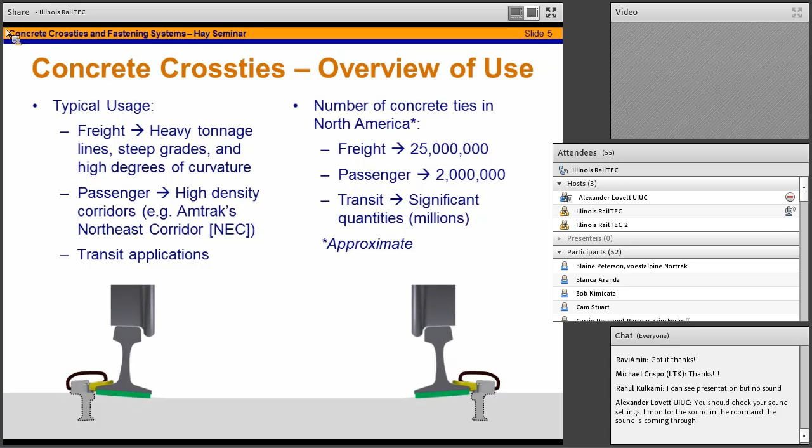So how many of these do we have in the U.S.? This is our team's estimate that we have about 25 million concrete crossties in the U.S. on freight railroads, about 2 million on passenger, most of which are on Amtrak, and significant quantities that we can't exactly wrap our mind around on the transit properties. So this gives you a feel, especially when you think about some of these components, that there are actually 4 components per crosstie that I'm going to talk about in a minute, up here on the front table. It's a significant number of infrastructure components. Yet concrete crossties still only make up about 7 to 10% of the North American infrastructure, but these are very demanding locations as described on the left.

So what are these concrete crossties and fastening systems? Some people in the room may not be familiar with them. It's a system made up of a group of components. First of all, we have the concrete crossties themselves. This is a picture of some that were being experimented on up at our ATREL facility.

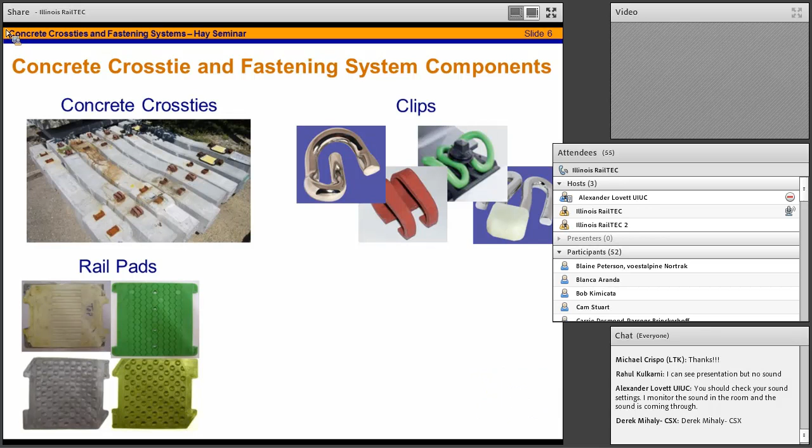We also have rail pads, and there's a bunch of examples of rail pads up here on the front table. I'm realizing it's going to be too far to go over there, so can I request a Vanna White type that will help pass some of these things around for me? It needs to be somebody on our team. Chris, Thiago, somebody there. Maybe send a couple of these pads around so you can see what these pads look like. There's all different varieties of pads, and we have many varieties of clips. So just pick a couple of pads and a couple of clips to send around the room.

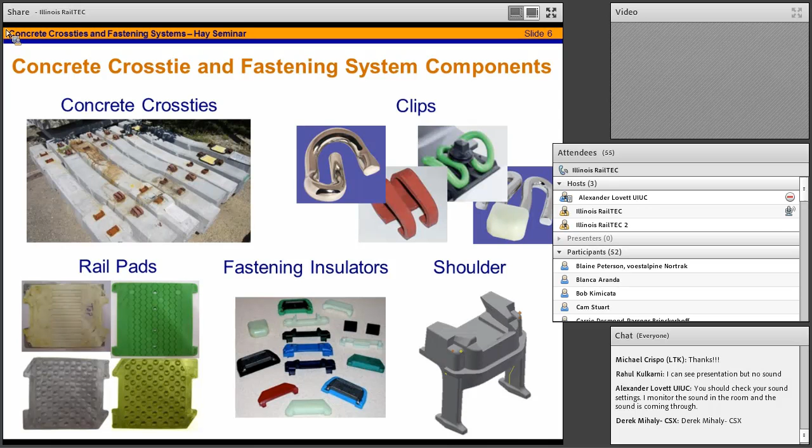These are the 4 major types of clips used throughout North America and the international community for that matter. We have insulators, many different types of insulators, and finally we have these shoulders. As I'll show in a second, what the shoulder actually does is allow you to embed the fastening system into the tie. Each of these components has to work together as a complete system, and you effectively pick one from each of these categories to come up with your system, and hopefully they work well together. Sometimes they don't, and that's part of what we're going to talk about in the presentation today.

Here's what the whole system looks like. Each one of these components being passed around, whether it be the rail pad, the clip, the insulator, or the shoulder—once you put them together, you have a nice looking system like this. This drawing is courtesy of Mr. Williams on our team.

The key component really is still the concrete crosstie, and that's what most people talk about. Our team likes to focus just as much on the fastening system, but a couple of words on the concrete crosstie really quickly. In North America, they're predominantly pre-stressed, precast products. There are a couple of instances in Mexico especially where we use post-tension ties, and you can actually see a couple of these ties in and around Newmark Lab.

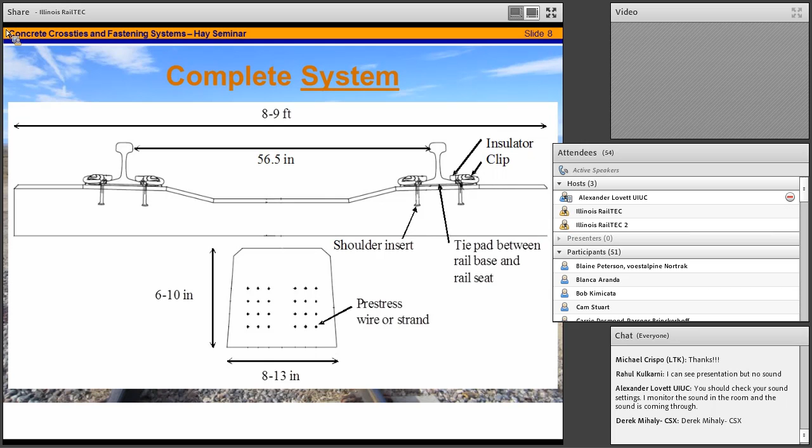Ryan Kernes, one of the research engineers that I'm ably assisted by, can show you some of those if you'd like to see a post-tension one. There are all different permutations of the system, and when you put them together and go out in the field, you have a system that's hopefully operating well holistically.

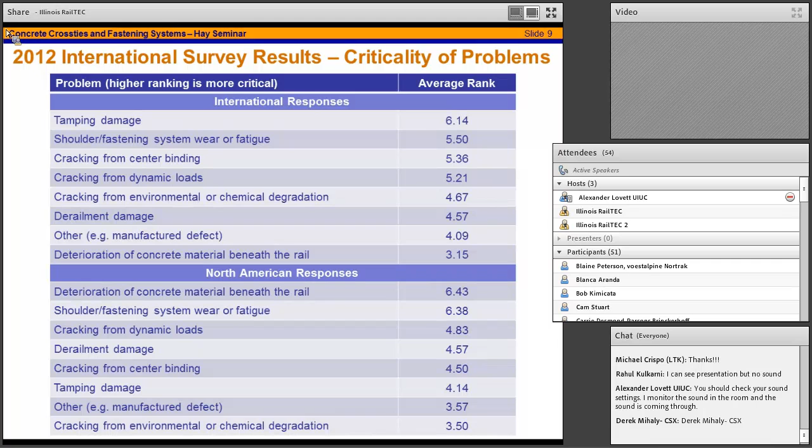One of the things we heard, and what led to this research, was our understanding that there are significant performance challenges with some of these components. This led us to conduct two different studies, the second of which was conducted in 2012 by graduate student Brandon Van Dyk, allowing us to survey the international research community to ask what are the most critical problems you have on your concrete crossties and fastening systems.

In North America, where our research sponsorship is coming from, we found that deterioration of the concrete material beneath the rail, sometimes called rail seat deterioration, and fastening system wear or fatigue are some of the most critical problems. The areas highlighted in orange at the bottom are areas we're addressing with our current research program, so we're excited to be addressing a lot of problems that the railway industry deems critical.

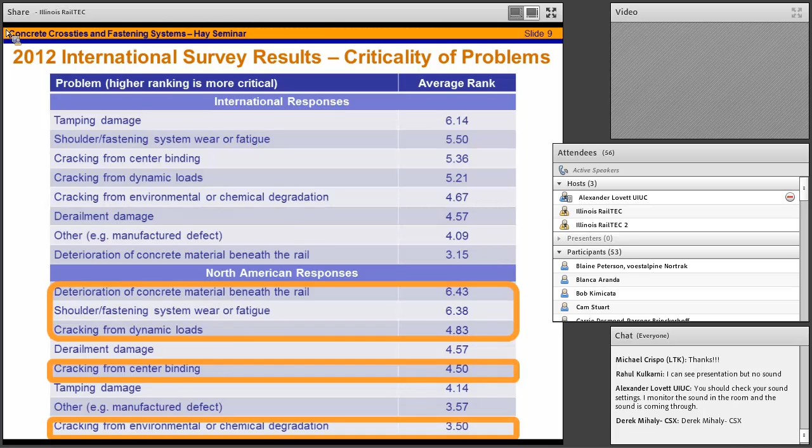Here we are with RailTEC's Concrete Tie and Fastening System Research Program. The way I like to look at it, we have three key categories or research levels: materials level research, component level research, and system level research. Within those blue blobs on screen, you can see some of the different projects within each of those areas.

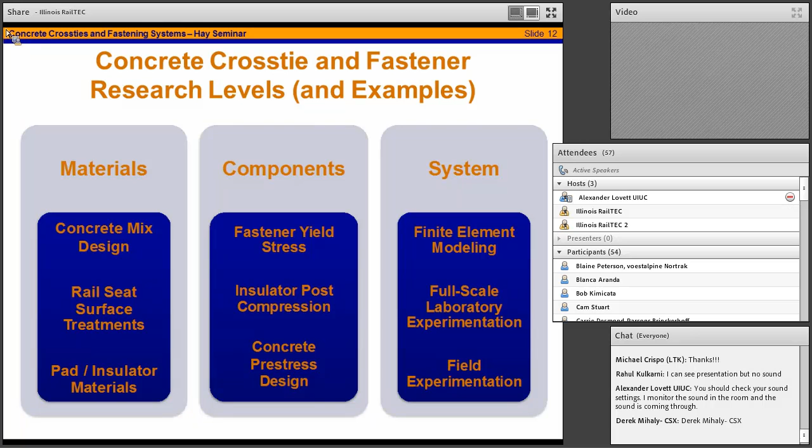On the materials side, I'm ably assisted, and many of the projects are being led by Professor David Lange. We also have component level projects that allow us to investigate stresses and strains within individual components, and then there's some amazing system level work we're doing that's centered around the development of a finite element model.

What I want to do next is go through three slides. I've already talked about our human resources—you've seen the hands go up of the people actually conducting the work. What I want to show you over the next couple of slides are the tools we use, which are only as good as the plan you develop to actually use them. But you'll see some of the tools we've used to conduct research that will be presented later.

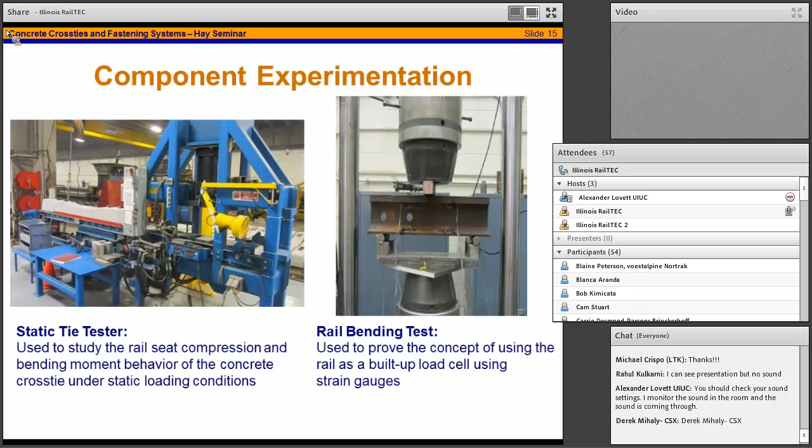At the component level, we have a static tie tester down in the Newmark crane bay. There's some work going on by Ryan Kernes using that machine right now if you want to go down and see how it operates. We also use other equipment in and around Newmark, like uniaxial testing machines, to conduct tests on rail.

This helps us understand how stresses are moving throughout the rail as they enter our fastening system. At the system level, here's a couple of our frames that we have at present. One is the pulsating load testing machine, owned by Amsted RPS, housed at the Advanced Transportation Research and Engineering Laboratory, known as ATREL, in Rantoul. We also have a static tie, or static load testing machine there that we use for some experimentation.

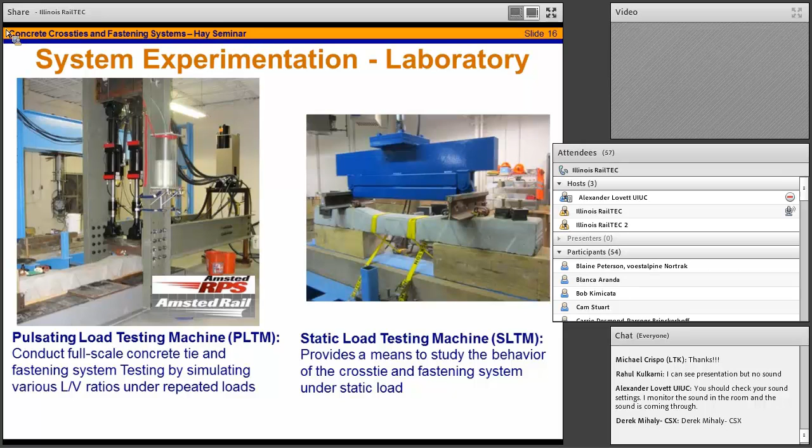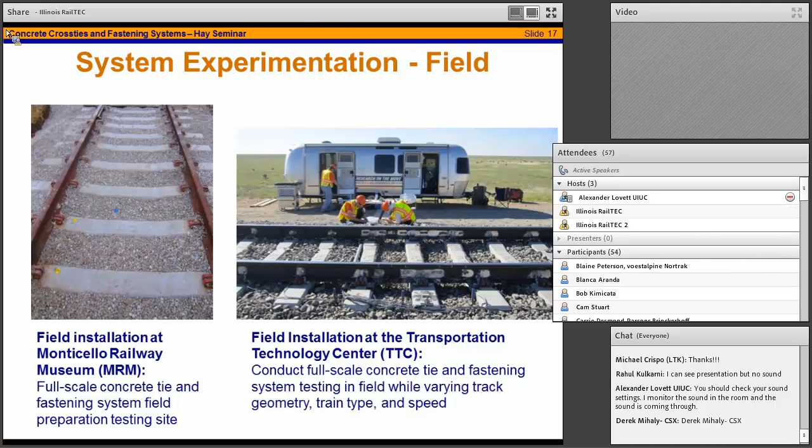So those are our laboratory system devices. Now, what we have in the field is a stretch of concrete ties at the Monticello Railway Museum in Monticello, Illinois, which, to our knowledge, is the only stretch of Class 6 or Class 7 track on a museum railroad in North America. We're pretty pleased with that 15-tie stretch. We also have two installations at the Transportation Technology Center in Pueblo, Colorado, which we'll be talking about later in the presentation. So those are the tools we have to conduct the research.

As I talk about some of the results here later on, you can think back to those specific tools that were used to generate the results. I can't go into significant detail on each one of those tools, but we have the brain power in this room to answer any questions you may have about them.

So what really ties our whole program together is the vision for mechanistic design. As Professor Barkan mentioned in the introduction to this presentation, we really want to come through very clearly to our sponsors and to the industry as a whole, showing this theme of mechanistic design. What I'm going to do is walk through a couple of slides that explain it.

The principles of mechanistic design are as follows, and I'm not going to read through all of these. I want to give you a high-level overview of what we're trying to do with mechanistic design. This has been employed in other industries and applications, and what we're effectively trying to do is capture the loading conditions at each interface and at each component within the system, and based on those actual loading conditions, design components that meet those requirements, and effectively, in the end, design a system that has at the component level all of the mechanistic design practices met.

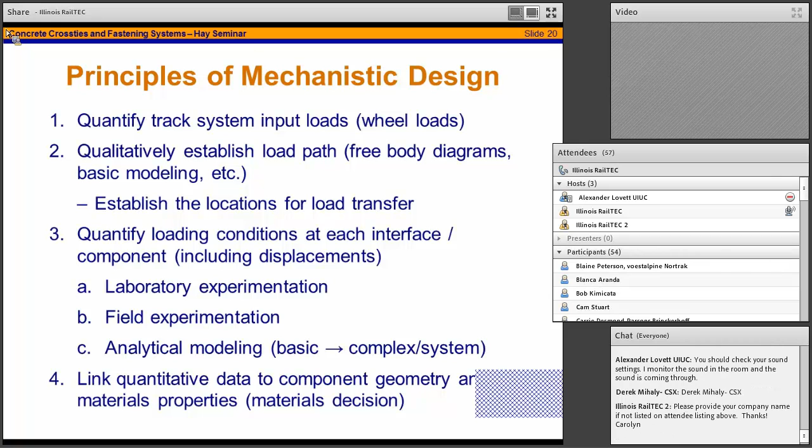So you can read through these on your own. This presentation will be posted on the web after we're finished, or it may already be on the web now. I'm going to talk about a few of these today, especially how we actually quantify the loading condition at each interface. That's a major thrust of this research effort.

So now I'm on slide 22, which is determining system input load. Step one, if we went through those other slides in great detail, we'd realize that step one is somehow establishing or quantifying our loading environment in terms of collecting data and analyzing that data. There are a lot of different methods we could use to figure out what loads are entering the track structure through the wheel-rail interface.

Here are some of the different methodologies: wheel impact load detectors, instrumented wheel sets, truck performance detectors, and then our very own homegrown UIUC instrumentation plan, which, if I fail to mention this later, was developed in conjunction with some key people in the industry, not the least of which is Harold Harrison and Mike Thomas, who many of you online are probably very familiar with. These systems and data collection methodologies that are out there right now are largely developed around the need to collect data for the mechanical side of railway engineering, for the health of the rolling stock.

We're going to try to take that data and glean useful information out of it that we can apply to the design of infrastructure. There are limitations to each one of these types of data that we could talk about in great depth, but for right now I want to talk about WILD data. We have effectively nothing else to go off of, so we're starting with WILD data, which is a well-established system for understanding the impact loads and the actual loading environment.

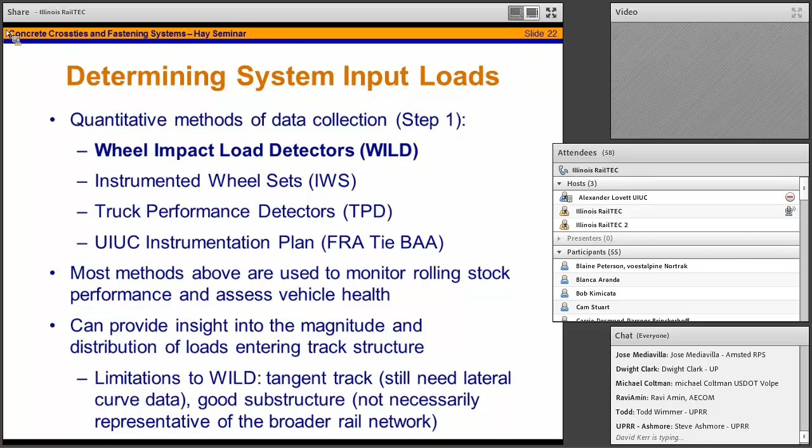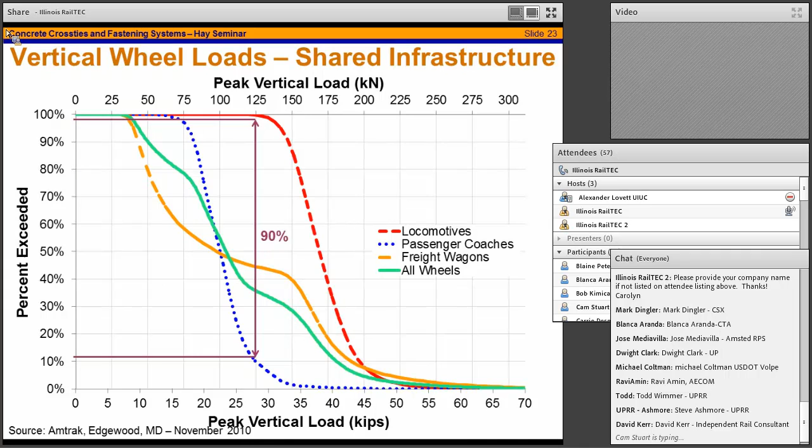You can see the peak vertical load is along the x-axis, and the percent of impacts exceeding these various thresholds is on the y-axis. For example, at about 27 kips, or about 125 kilonewtons, there's a significant disparity between the locomotives and the passenger coaches — about a 90% difference in terms of the percent of wheels exceeding that limit. So we're trying to design these shared corridors, shared infrastructure, around challenging requirements like this.

Another way to look at it would be on a chart like this that shows our nominal load in kips on the x-axis and our peak load on the y-axis. This gives us some vision for what the impact factor is. We apply a nominal load and then we get a peak actual load out of it — so what is the magnification factor?

What I want to show you next is, I mentioned the term impact factor and impact loading — well, it's a major parameter for the design of these concrete cross ties and fastening systems. At present, if you flip through the AREMA manual on recommended practices, you'd realize that there's an impact factor of 3 that's required currently.

Based on this data collected on Amtrak — and we appreciate both Amtrak and Union Pacific for providing a lot of WILD data for us — you can see that we have about 2% of loads exceeding that currently used predictor for impact factor. Impact factor, I'm sorry if I didn't say this earlier, is just the peak load divided by the static load. At this point we've also included the locomotives in this diagram.

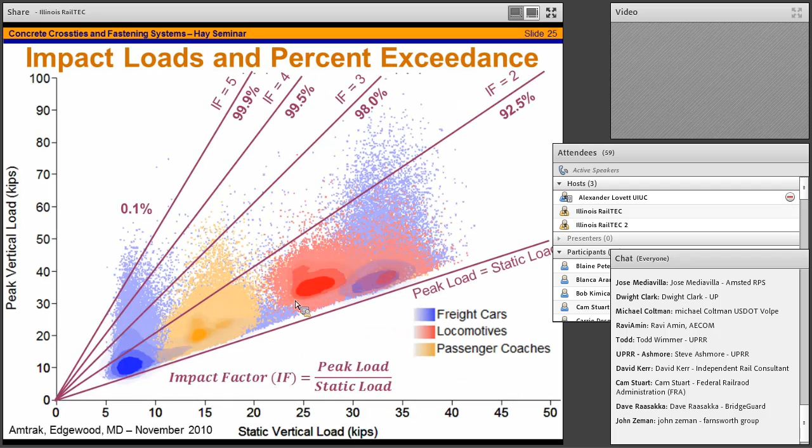This spread of data leaves us with the question of what our design threshold should be. Down on the x-axis, you could think of any load — it could be the rail seat load as shown there, or for those of you with the little plastic insulators in your hand, it could be the load transferred through that insulator. Whatever you want that x-axis to be, we need to look at the frequency of loads actually input into that parameter, and then determine, based on our knowledge of how these materials fail and how they're designed, what the design threshold is. This needs to be repeated for each component, interface, and failure mode.

So where is this going to take us? Well, this particular conversation is a point of reference — one we're going to continue with BASF Corporation, one of the suppliers of the plastics that are actually injection molded to make these pads and insulators.

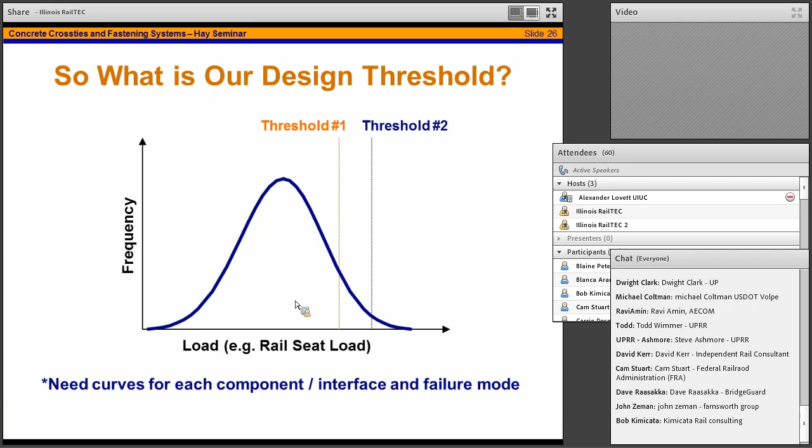So we're trying to figure out where are the design thresholds once we have the data, and where are we actually headed in the long run. We want to develop this quantitative loading model based on all the WILD data and some of those other types of data that we're also obtaining.

So as a function of speed, for instance, what is the peak vertical load for different car types, and what is the confidence interval around it? You can imagine this is very noisy data, so there are a lot of variables associated with the health of the rail car and the wheels specifically. This is where we're heading, and thus far what our data shows is that speed is not a critically important input into this determination of peak vertical wheel load, and we have reasons to believe that. We have reasons that we've documented to understand why that is the case.

Ultimately, this is what we're going to deliver as our output to the industry in terms of being able to understand what loads are actually imparted on the track structure. So we have on the x-axis our nominal wheel load, and on the y-axis our peak vertical wheel load. You enter this graph knowing your nominal wheel load and roughly the type of rail car that you're going to use. It's important to know the type of rail car because the suspension system has a major role in how the loads are going to be transferred from the rail car to the track system. If you want to know more about that, we're going to have a class coming up in a few weeks that discusses modeling that particular question in greater detail.

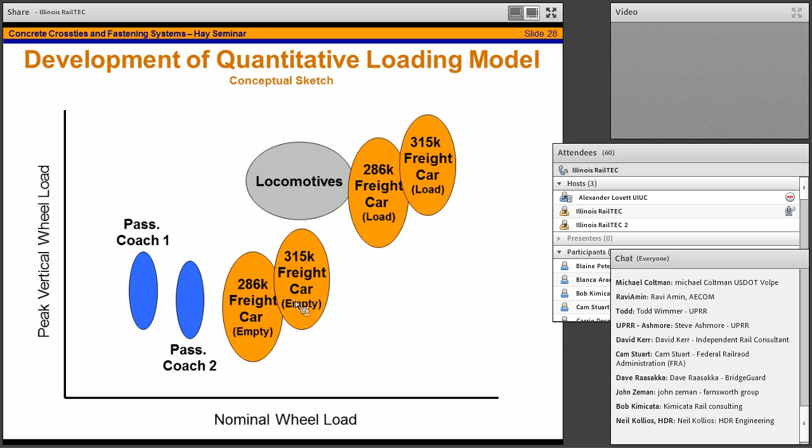So please, nobody run out and design anything based on this chart. This is just some things that were in my mind. You can see that as we have things like a 286 versus a 315K car, we know the nominal wheel load is going to be higher. We don't know exactly how much higher the peak vertical load is going to be, but this is our key output and is a major element in the process we're going through to develop a holistic model to take input wheel loads, suspected wheel loads, and actually chase that load all the way through the tie and fastening system, through all these components you see up here.

Once we know that input load, we have the load up here in the X and Z direction. Once we can quantify this load, we need to figure out how it's transferred through the system. Some of the students in our team who were awake in their statics and physics classes back in the day, and know how to draw free body diagrams, came up with this sketch showing all of the possible load transfer paths through the system. It doesn't show friction, so there are some other forces we've neglected, just like your intro physics classes typically do. But in short, it's a very complicated system.

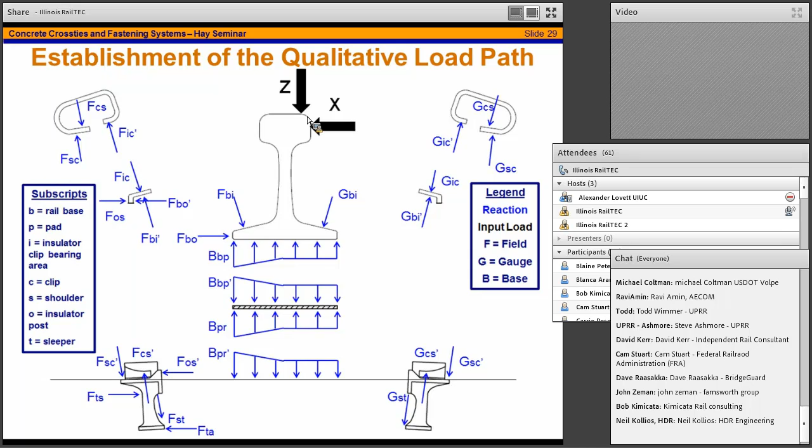There's a lot of different interfaces, a lot of different coefficients of friction throughout this. So just have this picture in your mind as we talk about the field testing here in a little bit later. Now this is great. What we've said is we've been able to quantify the load, or we're on the verge of quantifying the load at the wheel rail interface, coming up with distributions for those loads, and now we're chasing it through, at least qualitatively, through the fastening system.

So once the load gets to the rail seat, what would really be nice is to have a way of relating wheel rail loads to rail seat loads. You can imagine if you've been through any structural design class that having the rail seat load for a concrete tie is a key input parameter if you're going to design the tie. You don't really care what the wheel rail load is, because part of it may be attenuated through all of these products sitting on the front table up here.

You okay on this so far? You can ask me any questions. Nobody's fallen asleep yet, that's kind of exciting. It's not the case for all seminars. Yeah, Laura.

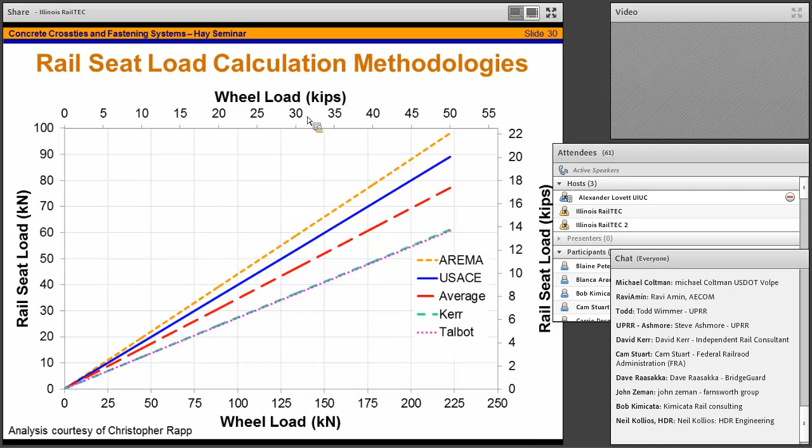This has to do with the graph - not designing anything on this - but how do you account for trains that have combined cars, like some with 15 cars and various types? That's a really great question, and we actually have amazing results to show, because how do we account for trains that have various types of cars with different types of axle loading? We actually ran all of our experimental field work based on a train made up of all different types of axle loads, because we wanted to vary the axle loads. So can you hold on to that question? Maybe you'll like my data later.

Now I want to talk about some of the key research thrust areas here within RailTEC. First, materials research - work that Ryan Kernes did. We applied a normal load to a mock concrete tie rail seat, then applied a lateral force to see if we could generate abrasion. We found we could certainly generate abrasion, but it wasn't incredibly repeatable, and it was hard to link back to some of the input parameters. So we changed the focus of that test. We checked off the box that abrasion is a feasible mechanism for rail seat deterioration, which is a big discussion point in the rail industry.

We looked into a different topic: monitoring the frictional coefficient of various materials under different normal loads. Why is this important? If you think back to the earlier slide, where we have parts smushed together in a system attached via clamping force from the tension clamp or rail clip, some parts are of different materials and geometries and are held together at times by friction. Then consider that we're applying lateral forces as the wheels go down the track - that's the applicability of this research.

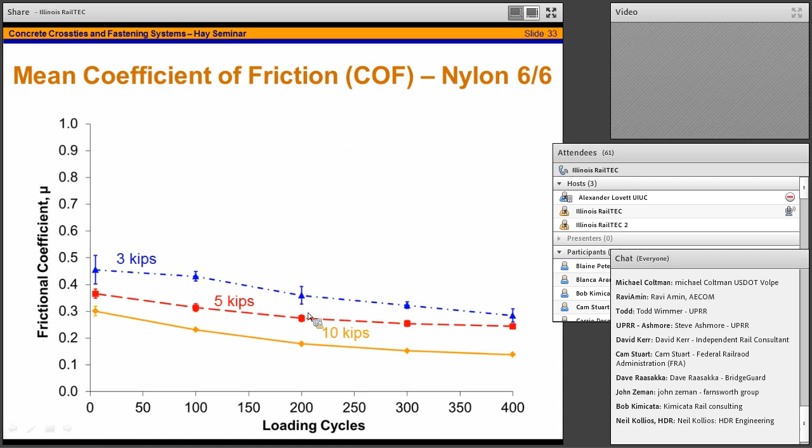Ryan has shown that the frictional coefficient deteriorates over time, over loading cycles. This 400 loading cycle experiment is meant to simulate a unit coal train, and the coefficient decreases as we increase the normal force. Also, there are many different materials used in the industry to form these rail pads. Here's a comparison between polyurethane and nylon 6/6, two common materials, as they're rubbed against concrete, and how their frictional coefficients vary.

If you understand how these materials perform in terms of frictional behavior, there may be a way to engineer a system with improved frictional properties that either minimize or increase the slip within the system, depending on what we need. The x-axis is unit loading cycles - not 400,000, just 400. It was a very aggressive test, and it lost half of its coefficient of friction over the course of cycles.

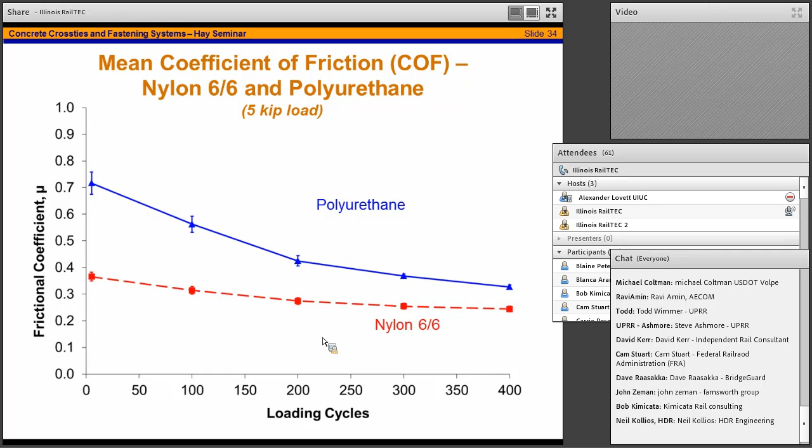It's an aggressive test, but those loads shown are representative of what's seen in the real world. The next work is being carried on right now by Emily Van Dam - it allows us to take mock concrete specimens and drop them in rings that turn and effectively abrade the material away, so we can compare the relative abrasion resistance between different specimens. This machine is downstairs in the crane bay if you'd like Emily to give you a free tour.

Some of the work we've done looks at how different mineral admixtures affect our abrasion resistance. You can see that certain amounts, like 15% fly ash addition, actually increase our abrasion resistance - in other words, it decreases the wear depth we're measuring after these tests, which run for about 100 minutes.

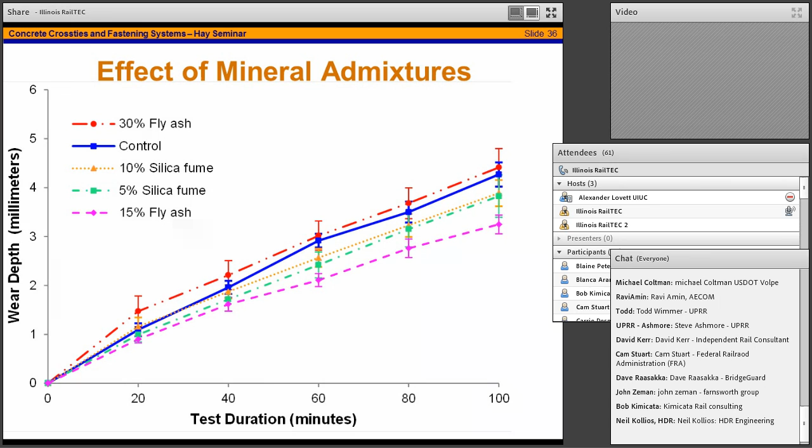There are long reasons that both Emily and Professor Lange can give you for why we think that 15% fly ash is performing well as compared to 30% fly ash.

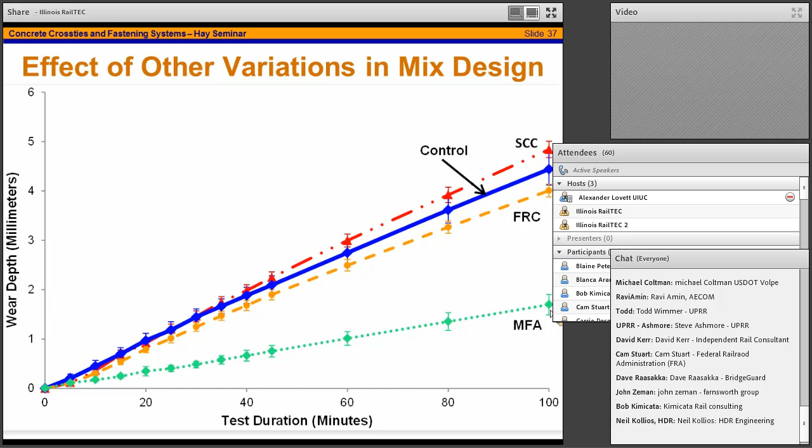Additionally, we did things—I apologize for the acronyms on here—but a few things I'll point out. This metallic fine aggregates is the lowest curve here. Once again, we have test duration on the x-axis and wear depth on the y-axis. So metallic fine aggregates relative to our control sample, same control shown on the previous screen, these perform very well. This is actually adding metallic materials into the concrete mixture. We actually have ties out in the rail industry called anvil top ties that are designed very similarly to how this mix design is put together. So just a couple of tidbits there.

We have all kinds of presentations that go into greater depth on this. Lab instrumentation—some cool stuff here.

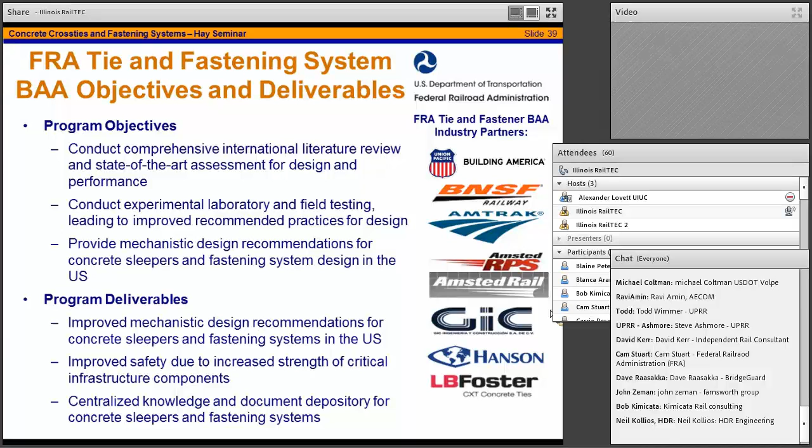As I enter into the lab experimentation portion of this presentation, I want to briefly introduce a couple of the final deliverables and objectives of this major FRA tie and fastener BAA. One key deliverable is developing recommended practices based on mechanistic design. Another is to increase safety and life cycle of these components, increase the safety of our infrastructure. We think we can do that through lab testing, field testing, and modeling that I'm going to describe here in a couple of minutes.

We're going to first start talking about the lab study, which feeds into our finite element modeling. It also guides us as we develop our instrumentation plan for the field study. So there's a significant amount of coordination on our team, and we have a lot of fun, but also a lot of time in meetings to discuss the coordination between these areas.

I'm going to only highlight a couple of areas with respect to the laboratory work, and this is kind of hot off the press. I'm excited to talk about it, but you can direct all your questions to Brent Williams, because I'm excited about this work and where it's headed—it's just really come out in the last couple of weeks.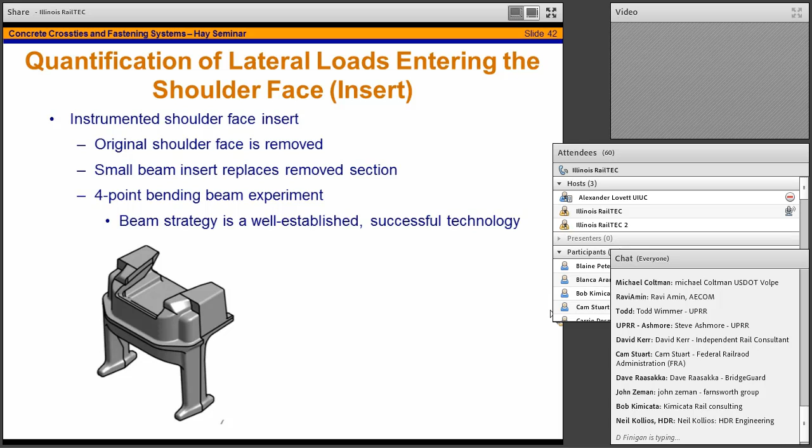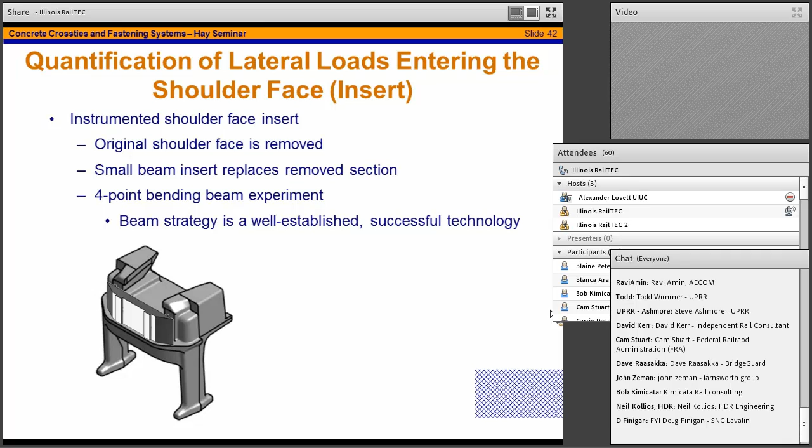One of the major areas in the railway industry in this specific domain of ties and fasteners that needed additional investigation is how much of the lateral force applied to the rail gets transferred into the shoulder. This is important because we see a lot of failures in and around the shoulder and the parts that mate with it. So our team took one of these shoulders, shaved off a part of it, and put a beam that's instrumented with a strain gauge, so we can conduct a 4-point bending experiment.

And here it is installed. We did some tests up at the Advanced Transportation Research and Engineering Laboratory. Brent, can you send it around, or has it already gone around? Oh, here we go. Here's the beam and the shoulder.

This is just one example of data collected up there. The blue line on top is the lateral load applied by the actuator, and the red line is the shoulder insert force. We can spend a lot of time talking about this, but from this snapshot of data, at this particular L over V ratio—lateral to vertical load ratio—and 32.5 kip vertical load, which is a representative high-end type load, with a severe L over V ratio, we see that nearly half of the load is being transferred through the shoulder face. This is important because the rest of the load is transferred through friction, through the clip, or through other components. So keep this rough 50% number in mind.

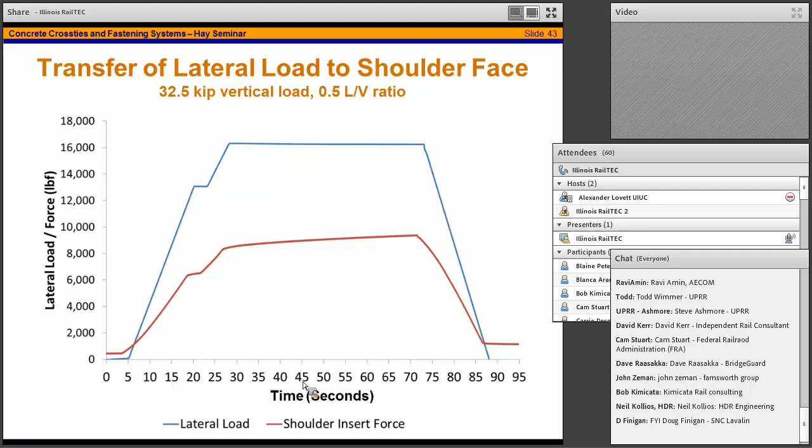This is the first time we think this has ever been measured anywhere, and Brent's going to be spending his spring break in beautiful Colorado to try to see if this is feasible to deploy more broadly. But we're going to be talking about this with the modeling effort a little bit later.

So this is cool stuff, Brent. It's going to be a major part of our instrumentation program this summer when we revisit TTCI, and we're very excited that we've come up with not just one, but two technologies that we think are viable candidates for measuring this force in the shoulder. And for those of you on the phone that have tried to tackle this problem for quite a while, we're pretty excited to get to present this to the industry once we have more data from our work here in the lab and in the field.

In addition, some of the laboratory testing has been centered around the use of sensors like the one that I'm holding here in my hand. What this sensor allows us to do is capture the pressure distribution on the rail seat. This is work that's been led by Chris Rapp as well, and it's allowed us to really understand what the different pad materials mean in terms of the load transfer at the rail seat. So it's pretty cool. You can see 3 different stiffnesses of pad materials here and what the different resulting maximum pressures are.

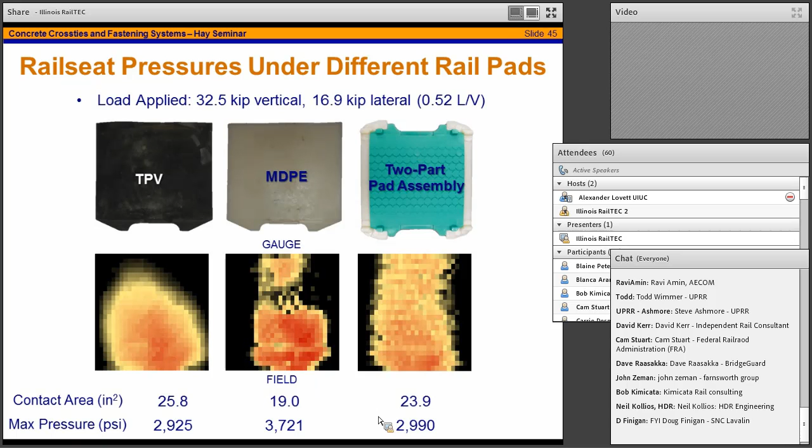This is important because we think that we're at the point, or close to the point, of exceeding some of the allowable stresses for the concrete in terms of actually crushing the concrete, and that being a potential failure mechanism for concrete cross ties and specifically their rail seats. So this work has allowed us to compare different L over V ratios, and we understand the relative differences both in the lab and the field, but with respect to the viability of the crushing mechanism, we're still not able to quite at this point conclude whether crushing is viable.

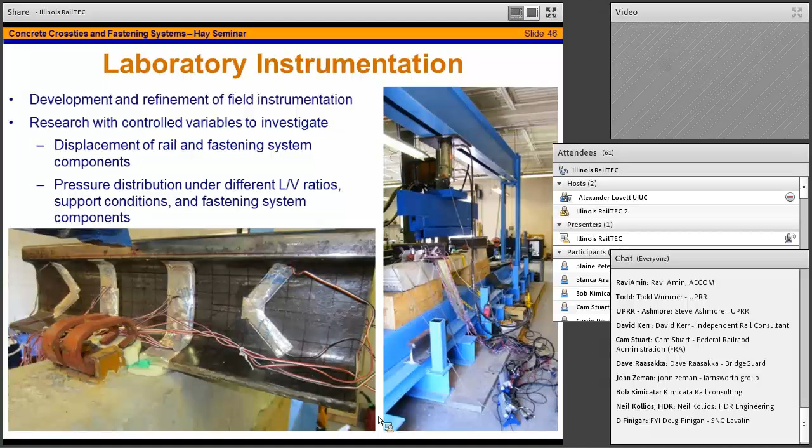Other laboratory instrumentation has been led by Sihong Wei and Professor Dan Kuchma. There's a lot to talk about, and they can give you full presentations on each aspect of the lab instrumentation.

And then finally, for the last thing I'm going to say about our lab work is this particular device here. This is the first time it's been unveiled in public. We're going to be developing a full-scale track response experimental loading system, which is going to be housed here at the University of Illinois.

It's going to allow us to apply a variety of loads to an actual track bed with full support conditions. And this is going to allow us to understand the response of the system under a variety of input loads. We're extremely excited about this. We've had tremendous feedback and excitement from the industry. The FRA has been supportive and is sponsoring the development of this.

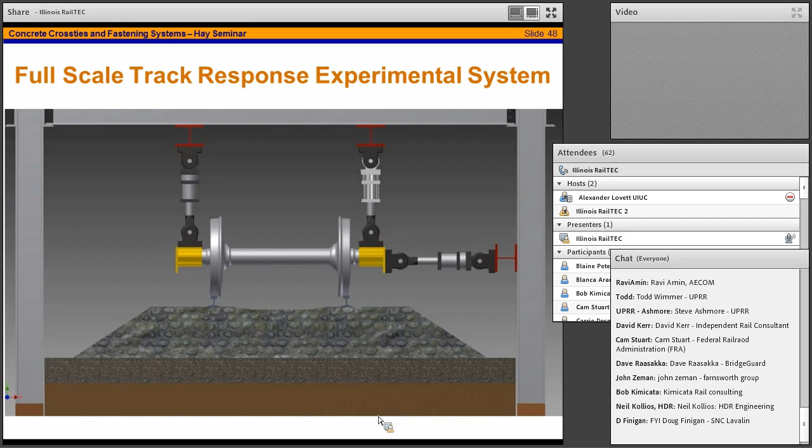And we're actually going to apply our loads using an instrumented wheel set. This is effectively a strain gauge wheel set that allows you to understand the stresses and strains, and more importantly, back into the input loads that are going into the wheel set, thus the loads that are going into the wheel rail interface. So we're going to have a very good fix on our input loads, which is going to further allow us to capture the exact loads entering each of our components that we have laid out on the top screen, or the front row up here. So this is coming soon to a university near you, which happens to be right here.

Field instrumentation. This is the part that I'm going to spend a little bit more time on and not go quite as fast because it hasn't been presented to this group, and we really did undertake a very sizable field study. The logistics out in the field was led by Marcus Dersch, who's one of the 2 awesome research engineers that I get to work with, and the faculty oversight was Professor David Lange, and it really was a huge experimental program. It's also linked to the laboratory study and the modeling because we're using these field data to validate our FEM modeling, which is the last step that I'm going to talk about today.

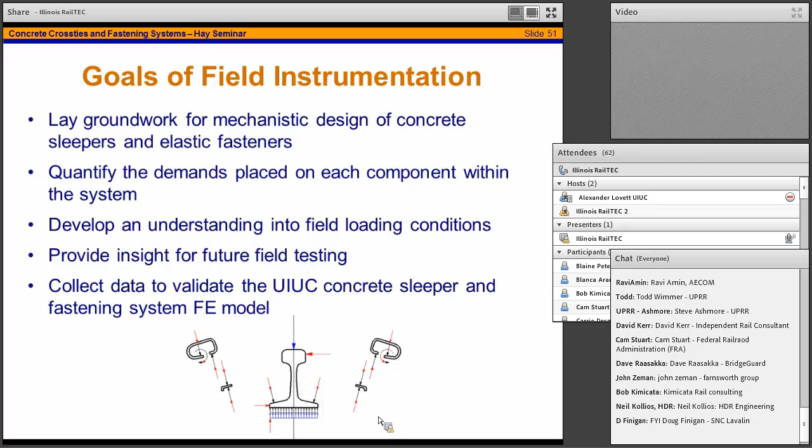So some of the goals of field instrumentation: we wanted to lay the groundwork for mechanistic design, understand what the actual loading conditions are out there in the field, provide some insight for future field testing, and collect data to validate our FE model. The FE model is something we're really excited about, and it's really going to be the end device that we actually come up with the recommended practices and run parametric analyses using. We're going to validate it using this field data, and then we're going to all get behind the model and run with the model's results.

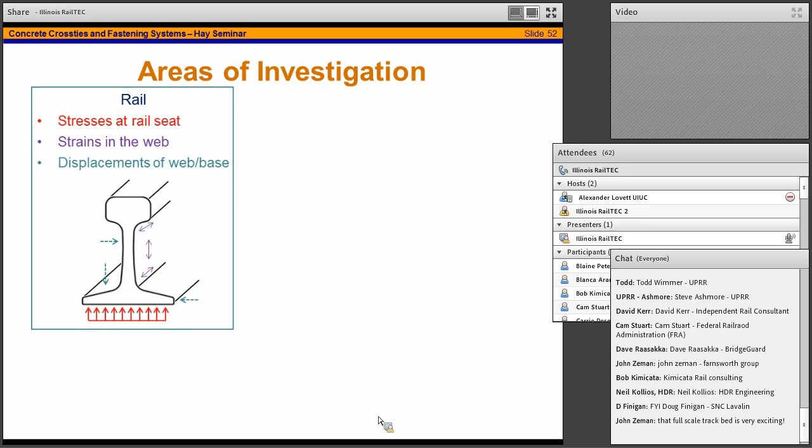So here's some of the areas that we investigated in the field. In the rail, we looked at stresses at the rail seat, strains in the web, displacements of the web and base. In the fastening system and the insulator, we looked at the strain of the fasteners and the stresses on the insulators. And for the sleeper itself, we looked at the moments at the rail seat, the stresses at the rail seat, and vertical displacements.

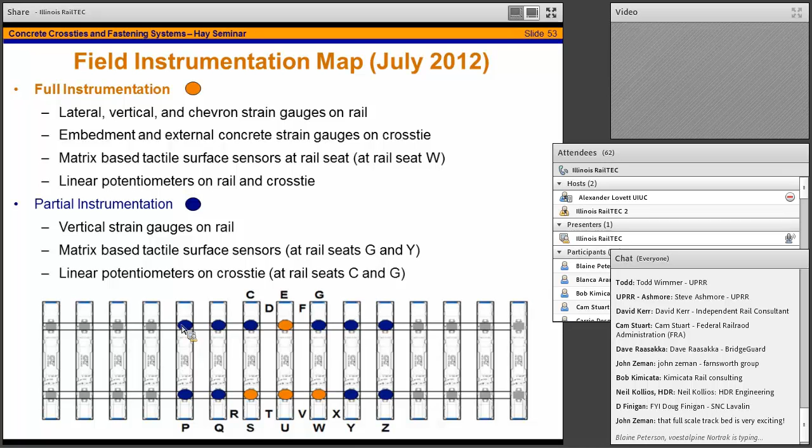We had multiple types of instrumentation. We had some rail seats, as you can see here, in orange, that we had full instrumentation on, and other ties we had partial instrumentation on. For each of the 2 sites, we had 15 ties that made up our test zone, and we instrumented the center ties in each one of those zones to try to avoid any boundary effects.

Prior to going to TTCI, Professor Kuchma, Marcus, Sihong Wei, and Justin Grasset went to beautiful Tucson, Arizona. We partnered with CXT Concrete Ties, our industry partner. They shut down their facility on a holiday and actually came in and cast ties for us.

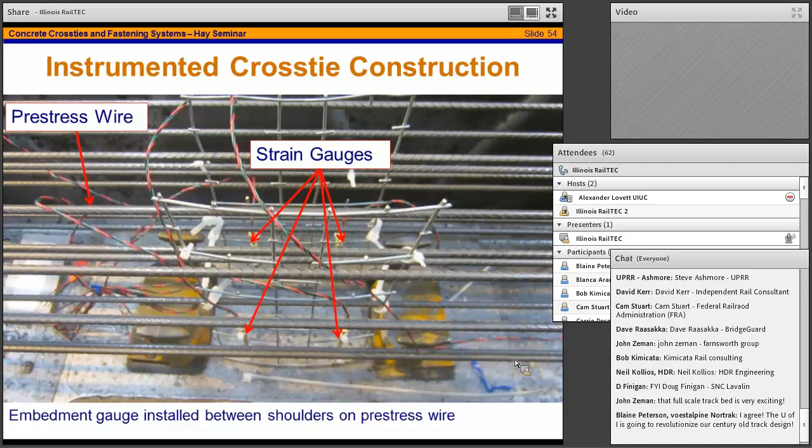This is actually vertically oriented strain gauges in the rail seat to show us the strains in the rail seat and give us a feel for what the vertical load is that's being imparted on the rail seat. Once these were removed from the forms, they placed these external strain gauges on the ties and then did some calibration of the ties before they were sent both to Colorado and back here to the lab, Colorado being Transportation Technology Center. So here's what some of the gauges look like installed, and Sihong's got some ties downstairs right now with the gauges on them if you'd like to take a look.

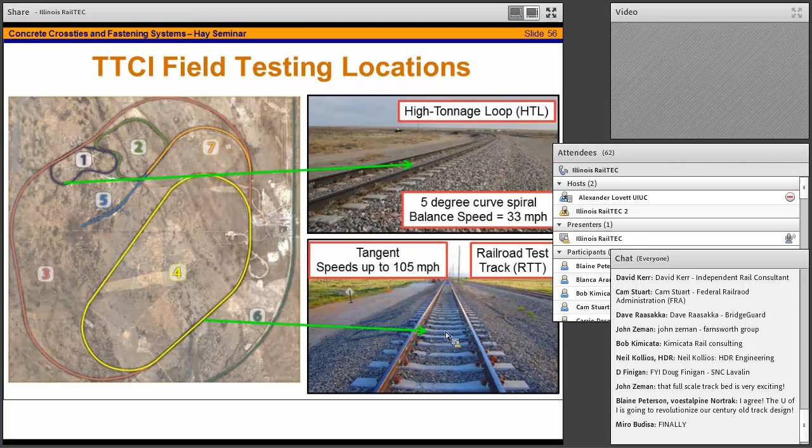So here's where we were at TTCI doing the field testing. Two locations: one of them was on the high tonnage loop, or the HTL. It was in a 5-degree curve, and that allowed us to run trains up to about 45 miles an hour. The other location was in tangent track on the railroad test track, which is about a 13-mile loop that allowed us to run a diesel-electric locomotive and a passenger train up to about 102 miles an hour, our max speed. The folks at TTCI were tremendously helpful as we conducted this testing program.

So one of the things I thought, instead of listening to me talk about the objectives of the field test program, I'm going to get some water and I'm going to let Professor Lang tell you some of the objectives of the field test program. Professor Lang, why don't you tell us why we're out here and what we're doing today?

No, I'm not. No audio. All right, we'll give it one try, and if it doesn't work...

We conducted some interviews while we were in the field, so we knew when we would come back we would want some at least B-list type movie producer to develop a film based on our summer activities. So that's why we were grabbing some videos out there. Yeah, it worked earlier, so I'm not sure why it's not.

Sorry. So let's pretend that Professor Lang very articulately explains the objectives of the field experiment. Effectively, we had about 10 students out there. We were conducting research to understand how these loads are passed through the fastening system.

The loading environment, we had a couple of different things that we were using out there as tools in the field. One of them was the track loading vehicle, which is this amazing machine that allows you to deploy an axle, as you can see here in this image, and apply both static and dynamic type loading conditions. We can determine the track modulus, and it was an extremely helpful tool, allowing us to validate the model.

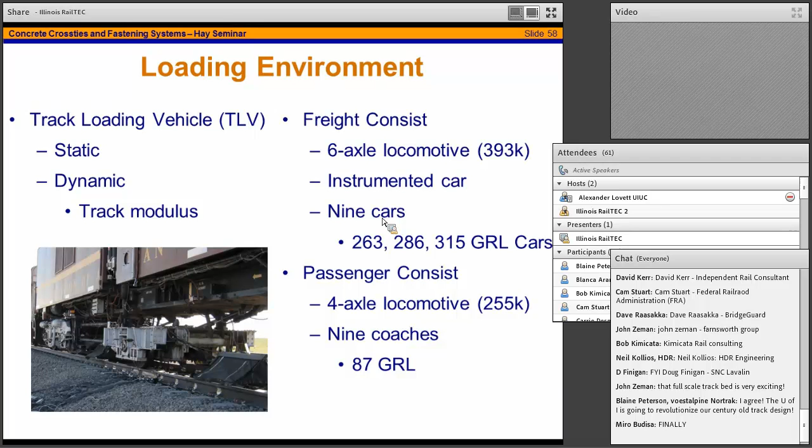In addition, we had a freight consist and a passenger consist with the cars that are described there. We had a variety of cars to answer Laura's question earlier, so we could get a variety of axle and wheel loads.

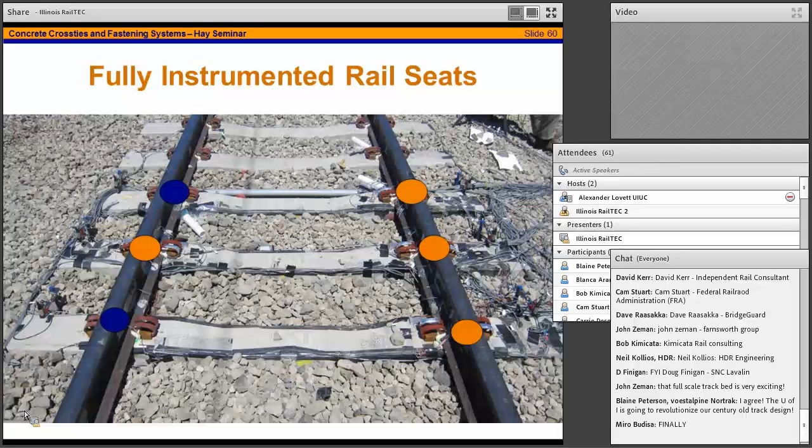So here's some of the rail seats, a couple of images up close. For those who haven't been around field instrumentation, I learned a lot through Professor Lang and through Justin. Justin was kind enough to let me help out a little, but most of the things I did, I messed up and he had to redo. So here's some of the rail seats that we instrumented, both fully and partially, as we showed on that screen a couple of minutes ago.

Let's look a little closer at the instrumented low rail, and then zoom in further on the center rail seat. You can see we have instrumentation that allows us to get the vertical sleeper displacement. I'm going to send this around. If you've never seen what a potentiometer looks like, this device is in a different frame - you'll see that frame in a minute, but it allows you to measure displacement. Can you send that back?

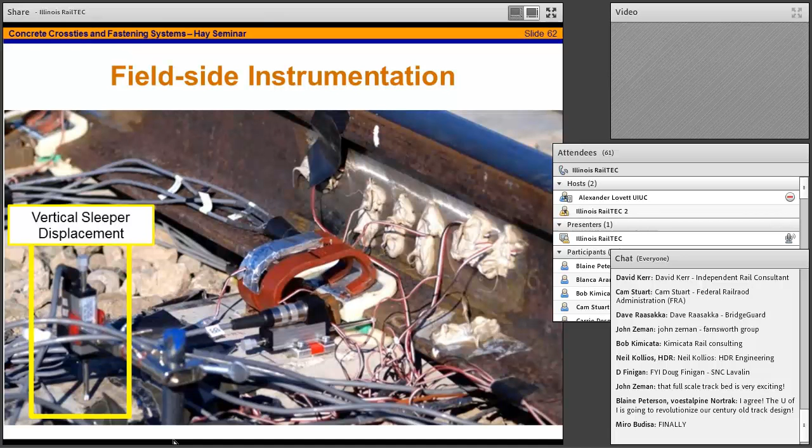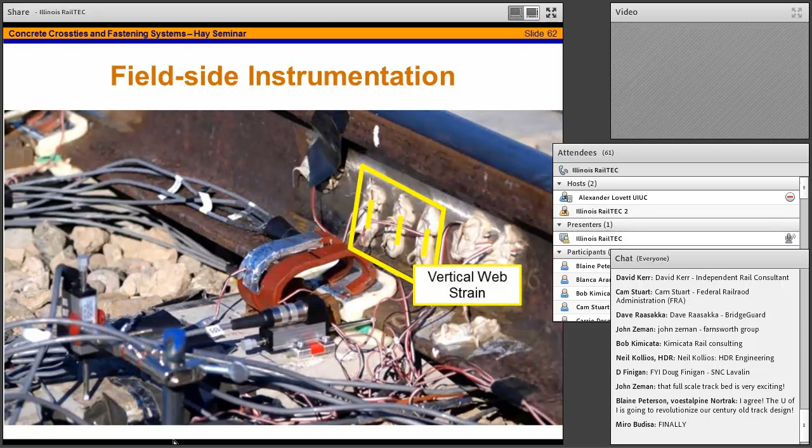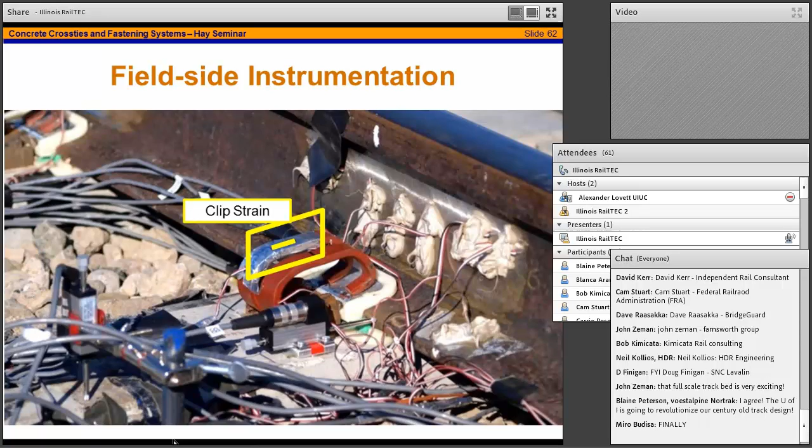So we use potentiometers to get the global displacement of the sleeper so we understand the track deflections. We also use a potentiometer to get the base displacement of the rail so we know how much it's moving. We have a plethora of strain gauges, more than we care to admit, but it took a crew many weeks to install the strain gauges on the rail that allow us to get the vertical and lateral forces. We also have strain gauges on clips so we understand the stresses in the clips as a wheel load passes over.

On the gauge side, we have that device going around, which is our fixture to measure the lateral rail displacement. So you got a feel for some of the things we're measuring. All these different devices feed into this data acquisition system that Justin managed and did an amazing job with. There's a lot of wires there. I never understood, you know, everybody talks about getting your wires crossed - I never understood that phrase until I went out there this past summer with this team.

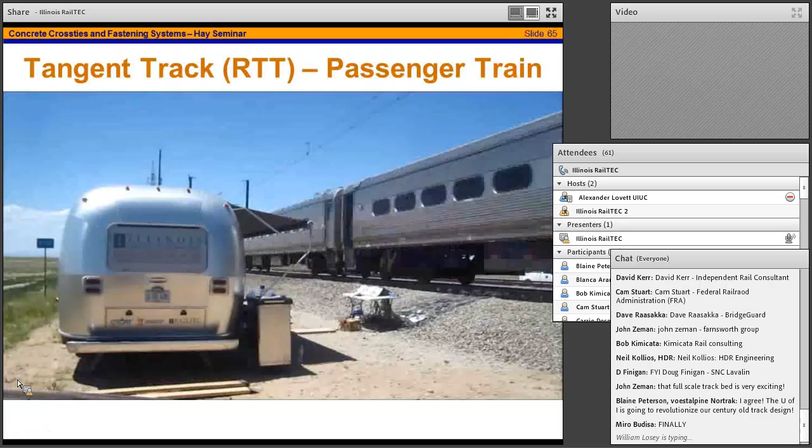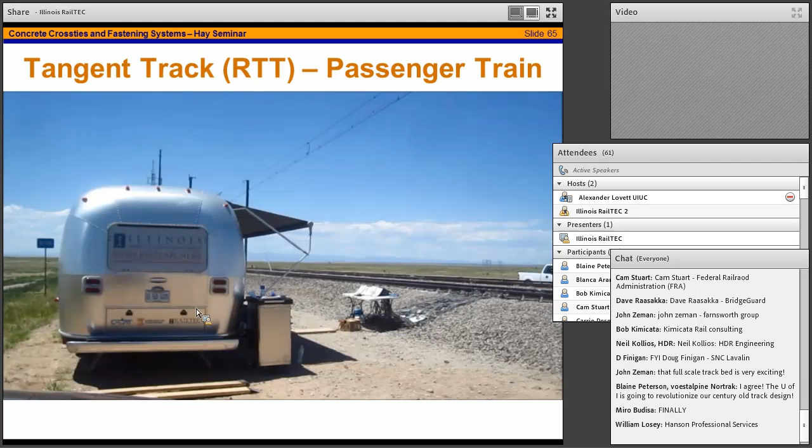This is our mobile research lab as well. Professor Lang and his team have outfitted this particular Airstream trailer for use in situations such as this. So all of our instrumentation, all of our computers are inside of this trailer, so people are protected from dust and rodents and rattlesnakes in the case of TTCI.

And then also we ran freight trains. So if you want to see what it looks like from the instrumentation's point of view - or should I skip this one? No, okay. From the instrumentation's point of view, here's what it looks like with a freight train pass. I think Brandon's in the locomotive too.

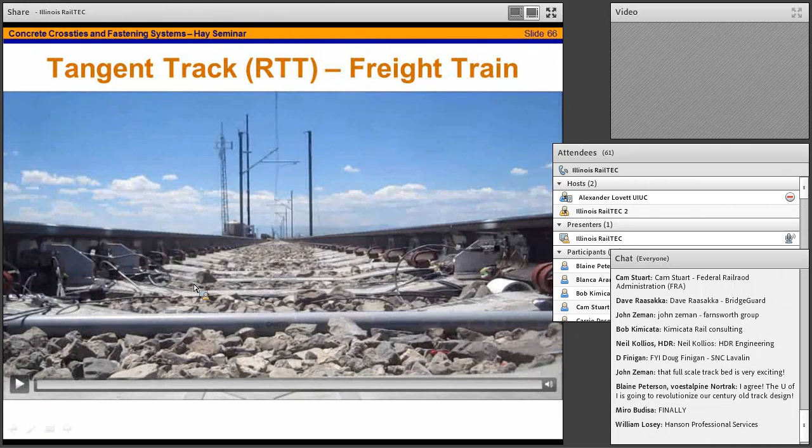You can see the different displacement gauges here on the sides, and we've got all kinds of wires sheathed in these PVC pipes here. It's a pretty aggressive environment - you want to have everything taped down and secured.

So that freight train that just passed over, what type of loads does it impart on the system? Laterally, here's what we've got - the max, min, and the quartiles on these graphs that Justin has developed. You can see we're looking in the 2 to 4 kip range for our lateral loads, which is about what should be expected on tangent track - there's not a lot of high lateral forces there. This represents a significant amount of data and replicates, because we ran it at least 2, if not 3 times at every particular train speed.

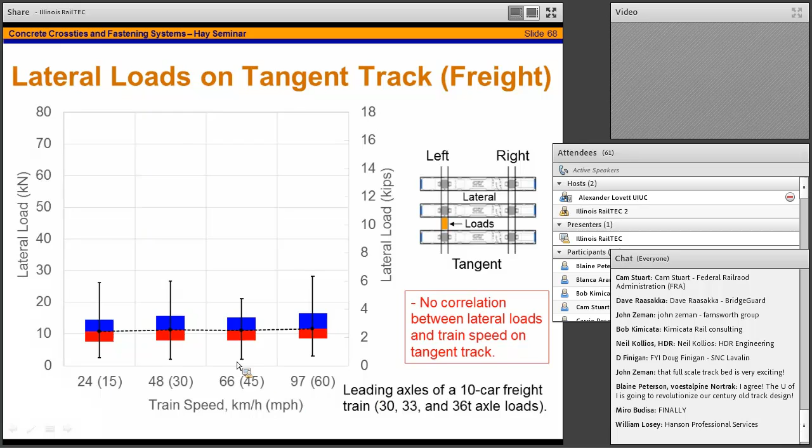So we see there's not a lot of speed dependency—I'm sorry I didn't point out, this is speed on the x-axis down here and load on the y-axis. So you can see there's not a significant correlation between speed and lateral loads on tangent track.

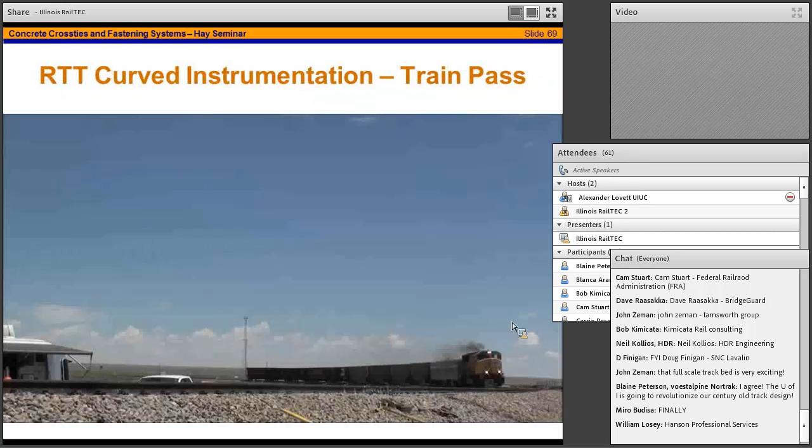So now you've seen that high-speed test location, let's go over to the heavy axle location, and we ran a freight train. If you haven't seen a freight train, this is what our particular freight train looked like. The first car behind the locomotive is actually the instrumentation car that is tied into an instrumented wheel set like I described earlier.

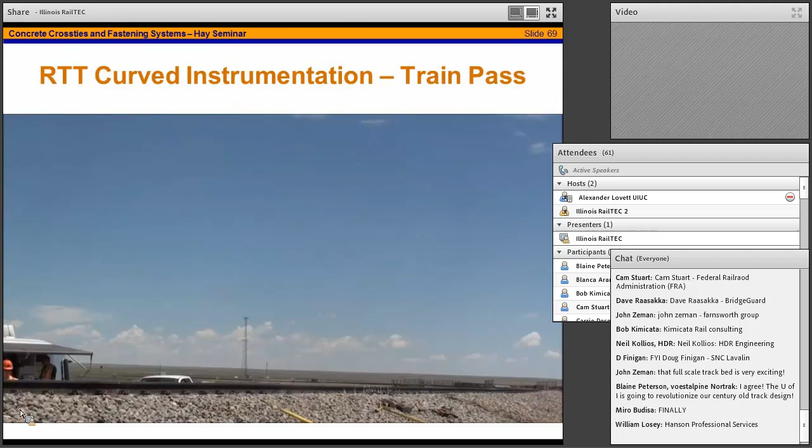So now you can see what the lateral loads look like. They're acting on the curved section of track. There's a greater speed dependency here. So we have these curving forces, and by the way, this is on the high rail seat on this curve too.

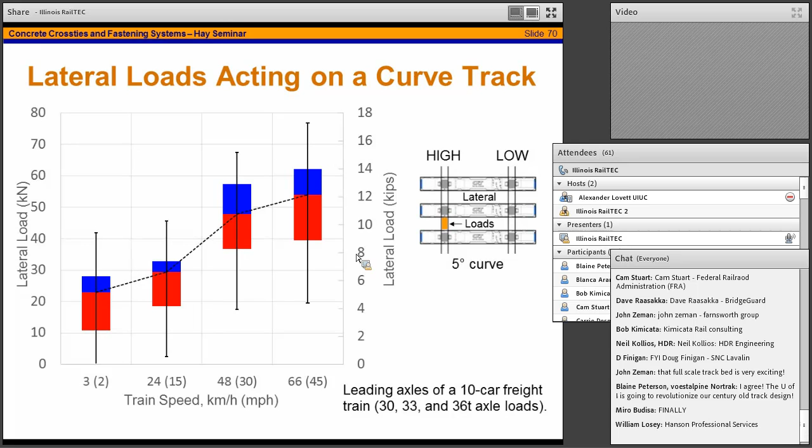So the balancing speed, despite what that slide said earlier, is somewhere in the 20-mile-an-hour range. But you can see that they're much higher lateral forces here, about 5 times higher on average in the curve versus the tangent. So it dictates how you design these components that are having to withstand these lateral forces.

Another thing that we were checking this summer is we wanted to understand the deflection, the global deflection of the track, because we feel like the relative difference in the support of each tie has a major impact on how much load is actually being transferred through that tie down into the subgrade.

Despite our efforts to tamp the track evenly and have a uniform track section, we didn't have enough tonnage that ran over the site prior to conducting these tests, so we had a lot of variability, and that's something we're planning to change. This particular test does give you another manipulation of an experimental condition.

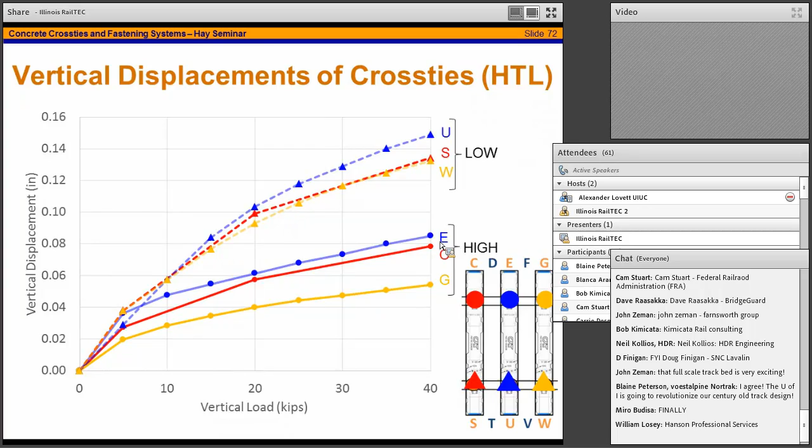Here's our static deflection. So this is for one of those rail seats that I've shown. What the static deflection we found did is actually defines the frontier of these displacements.

So we don't ever reach this maximum static deflection that we saw using the TLV. And this makes sense because we have these moving loads and the track structure doesn't have as long to react under these moving loads.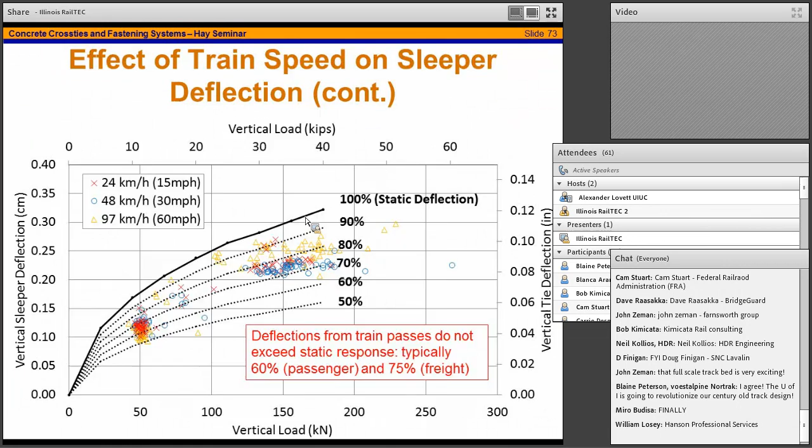Also, another question that we had is how does sleeper deflection relate to train speed? You can see here that each one of these X's actually represents 88 data points. We need to put some error bars on here in the future, but it represents about 88 data points in terms of axles and replicates.

So what you can see here is that the deflection of the whole track structure is not incredibly dependent on speed. As a matter of fact, you see pretty much nothing in the passenger and a very slight increase in the freight train. So, yes, sir, Ernie.

It might be well to point out that the soil that's out there is a fairly granular soil and not a clay, so that the difference in static versus moving loads would be greater under different conditions.

Professor Barenberg points out a couple of good things I forgot to mention. Number one, it's a granular soil out there, not a clay or some of the other poorer soils that are more indicative of the rest of our rail network, so it's a very stiff subgrade out there. That's something we have to understand as we're interpreting these results and calibrating the finite element model.

TTCI actually has to import poor soil just to conduct tests out there. They bring in clays from Mississippi just so they can conduct tests. That came from the Waterways Experiment Station down in Mississippi. Ernie Selig and I did that.

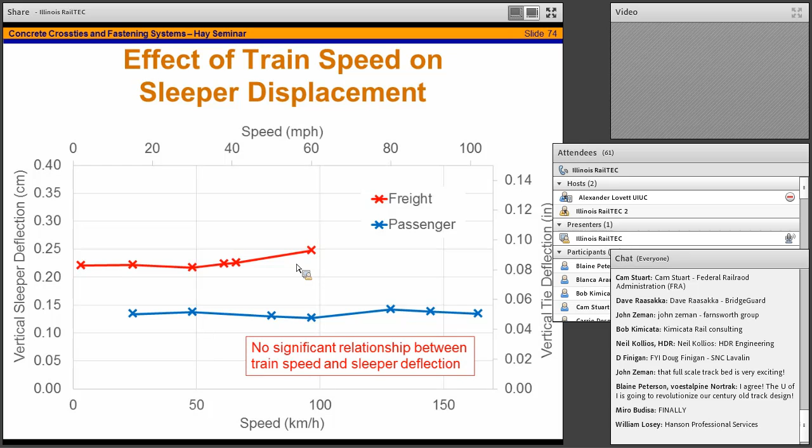This is looking at one particular rail seat, zoomed in, because it gets complicated on this slide if you look at multiple rail seats. We had 6 different places where we were measuring displacements at 6 locations at each of those two field installations. So that's some of what was done in the field.

How about some analytical methods here? Let's finish out by talking about the finite element model and what we're hoping to accomplish through it. Once again, it's a critical element of the project. It connects to both the lab study and the field study and has given us significant insight into where we might place instruments and what type of information we need to be collecting in the field and the lab. It's been an amazing experience so far.

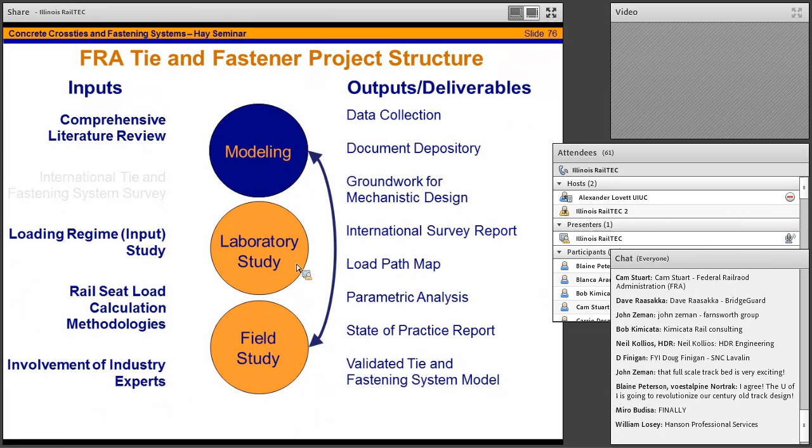This work has been led by Professor Bassem Andrawes in our structures group. Postdoctoral researcher Moochul Shin and George Chen are the two folks working on it full time for Professor Andrawes. So here's what we're doing.

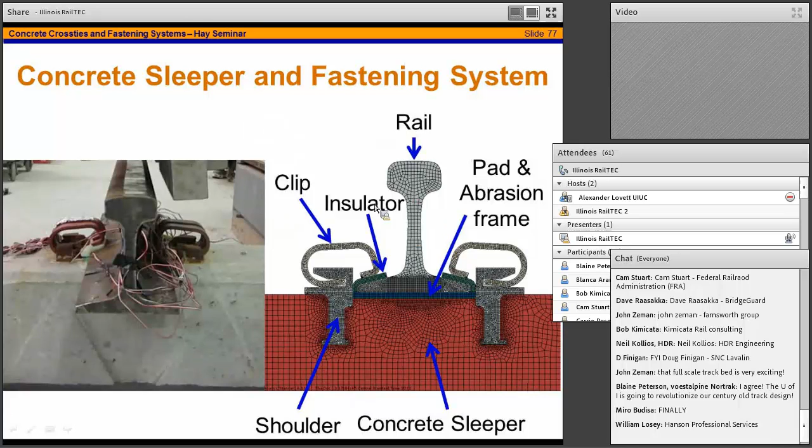We're trying to take this complex system and represent it in finite elements, and you can see we've done it component by component. This is an example of a rail clip and the rail clip model. So individual components over the past year and a half have been modeled, and each has been validated through some methodology.

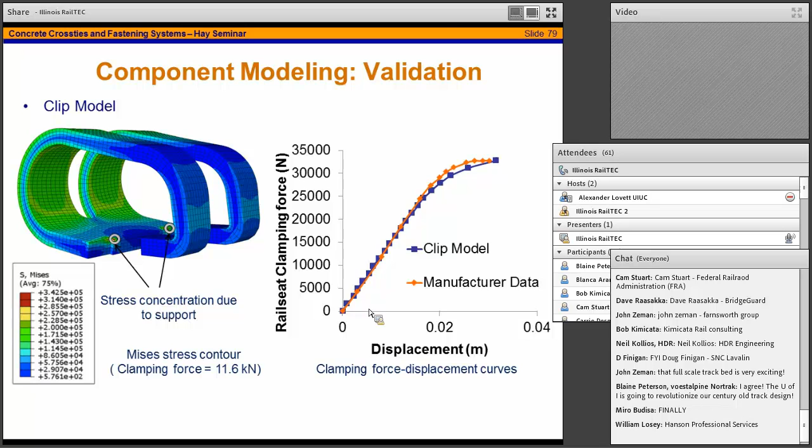The rail clip is relatively simple. We have manufacturer's data, effectively force displacement type data for these components, and then we validate our model based on the manufacturer's data to see if they agree. For the clip, we had really strong agreement. You're effectively applying an upward force to the toe of these clips to see how much it displaces for a given force.

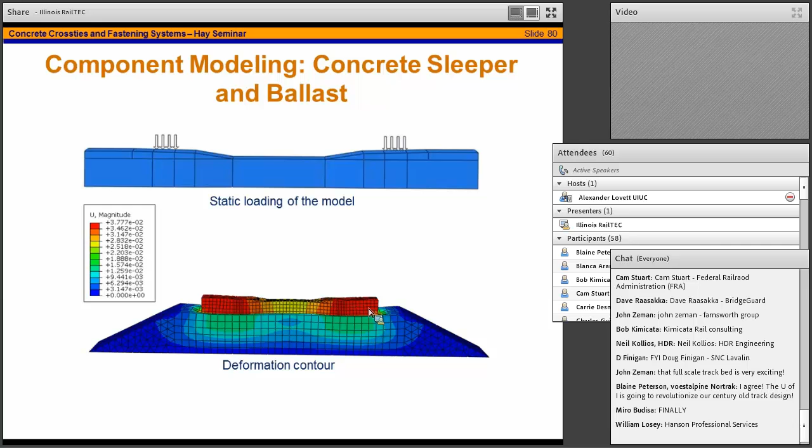We also spent a lot of time interfacing with Professor Tutumluer and his group to accurately model the support conditions for the tie. We're focused only on the tie, so we don't want to get too caught up in the substructure, namely because Professor Tutumluer is doing an amazing job within his group of modeling ballast through different methodologies, such as discrete element modeling. So we've got a model of the tie and then the support conditions.

One of the biggest challenges is that outside of Ryan's work I started talking about earlier, when we came up with these numbers for the coefficient of friction, we don't have a feel for what the coefficient of friction would be at these other interfaces. So right now we're taking stabs at what the coefficients of friction would be, and this is something we hope to monitor in the lab through work that Thiago and Brent are doing, and be able to feed that back into our finite element model to develop more representative models.

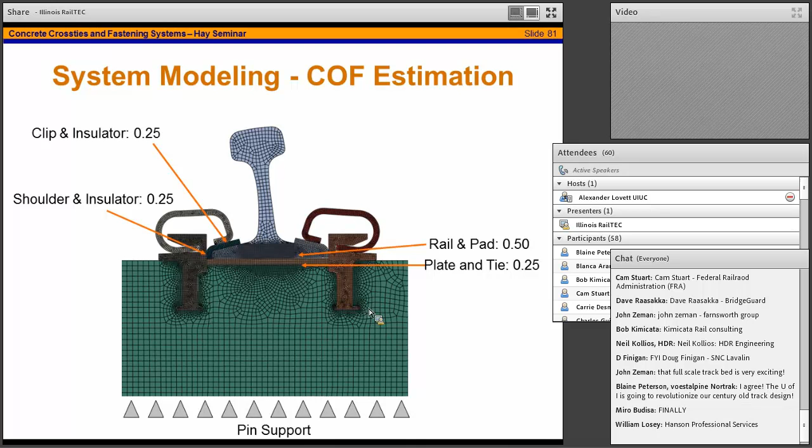But we're getting somewhere, and I'm going to show in a minute some of our preliminary results from this. For the tie level, or the single tie models, we've been using the SLTM machine that I showed earlier to validate that work, and there's a good partnership between the lab team and the modeling team for those validations.

Also in the field, what we're doing is using that TLV data we talked about earlier to develop a multiple tie model, to be able to look at the forces as you apply a single wheel load, and how it's distributed over multiple ties. One thing I didn't talk about with the field data, and I think at some point we should get a more focused seminar just on the field data, is that we undertook efforts to calculate the rail seat loads. One thing we found is that there's a huge variety, mainly determined by support conditions and what loads are actually being accepted by the rail seat.

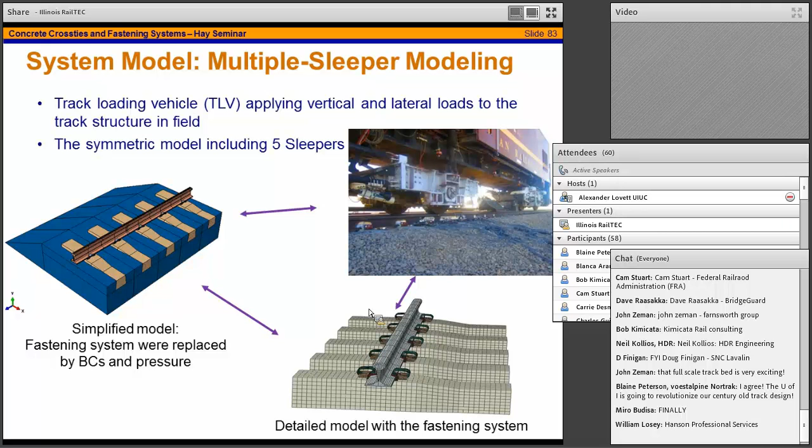So you put an input load into the wheel rail interface, and you may get from 20 to 90% of that load being accepted by the rail seat immediately under it, depending on the support conditions.

So we're working to further iron that out, and this model is going to be a key tool to help us do that. The only output I'm going to show you from the model right now is a slide that goes back to that free body diagram. Several of the interfaces in the free body diagram are represented in this particular sketch, and I want to draw your attention to this blue line.

The top line here is the lateral load that's applied to the system under a constant 36 kip vertical load. So we're holding the vertical load and applying a lateral load—roughly the same thing that Brent did in his experiment up at Atrel that I was showing results from earlier. You can see that this insulator post, which effectively represents the forces being transferred into the shoulder, is about 50% at these higher L/V ratios.

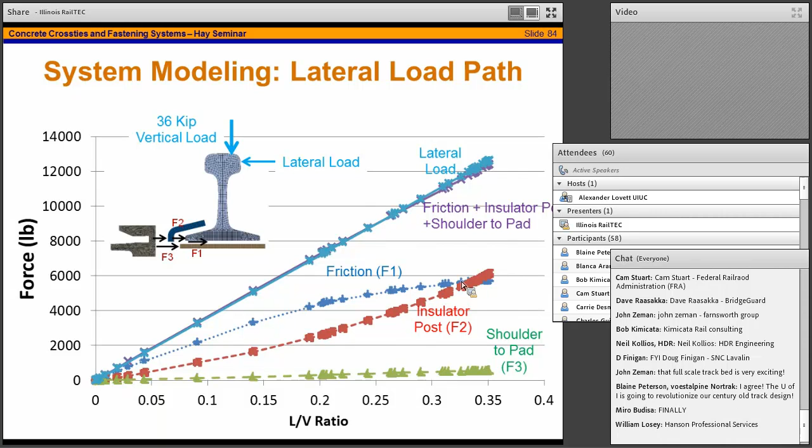So this is our first step at validating the effects of friction in the system using actual experimental data in the lab and comparing that to our model output. We're pretty excited, and we're going to move forward with further refining this model and capturing more data here in the lab and in the field.

We're going to look at additional comparisons. We're going to do large-scale modeling, apply more realistic loading. Ultimately, we've got to be able to do dynamic loading in our model, which is a challenge, and then conduct a number of parametric studies.

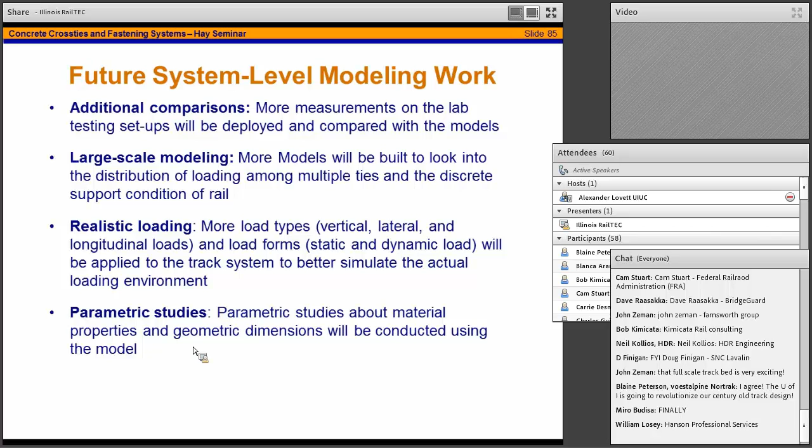I was alarmed yesterday or the day before in a meeting where one of the students calmly spoke up and said that we have, in terms of second-order effects, 3.5 million second-order effects to investigate in terms of this tie and fastening system. Sounds like a couple of PhDs right there.

So finally, future work. Here's what we're working on. This is the near term, let's say within the next year.

More data analysis. We really are fascinated by the lateral load transfer, and the entire instrumentation plan that Professor Lange is leading along with Ryan Kernes is going to focus on the field work. It's really centered around measuring lateral loads out in the field. We really want to be able to capture exactly what the lateral loads are.

Oh, this is running long, sorry. Just about finished. So we're going to focus on lateral loads in the field and analyze that data, validate the model—we already talked about that.

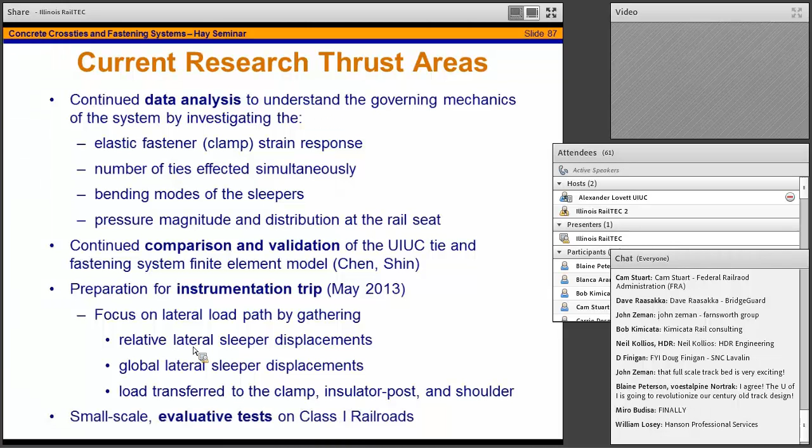This instrumentation trip focusing on lateral loads is something that's never been conducted in the industry thus far. We really don't have a feel for what the lateral loads are that are being seen, thus we don't have a lot of design requirements based on lateral loads. It's really hard right now to design fastening systems without understanding what lateral loads are being imparted on the system. That's going to be the main thrust of our instrumentation trip in late May of this year when we go back to TTCI.

And then ultimately we're going to take small parts of our instrumentation plan and deploy them on the Class 1s.

So here's some of my thoughts on where we're going in the future with these components. I'm sold on concrete cross ties and fastening systems. I know that they have a role within North America, and more importantly, I think they have a larger and larger role, especially as we have shared corridors and shared infrastructure locations where we need to run passenger trains on heavy axle freight infrastructure.

So I think if we pursue mechanistic design and materials choices in terms of concrete materials, other improved plastics, I think there's a lot of low-hanging fruit in terms of research on plastics or other advanced materials. Professor Phil Geil is in the room and has some amazing ideas in terms of other innovative materials.

There's other products out there such as tie armor. That's a product that Amsted RPS has developed. I think these are keys—Kevlar type materials that are more resistant to some of the loads being imparted on the system.

I think we need to consider all system interfaces and how they affect the overall system design, understanding how these components interact. So getting a few of these things on the front table up here, rubbing them together and trying to really understand how they interact—I think that's key to success.

To borrow from some of the AAR's language: lowering the stress state of the tie and fastening system. This is another approach where we can have larger rail seats, and we can have under sleeper pads beneath the tie.

I'm getting hungry for lunch.

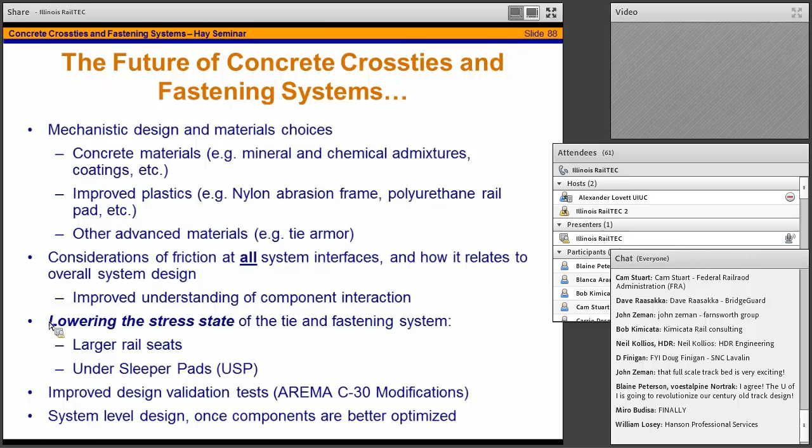Also, we need improved design validation tests. Those of us on committee 30 know that. And then focusing on system level design, once we have a grasp of what our components are supposed to do, look at the entire system.

Here's the amazing team that I'm very blessed to get to work with on a daily basis. Amazing sunset in the background, reflection. This is Professor Barkan's picture, which I appreciate.